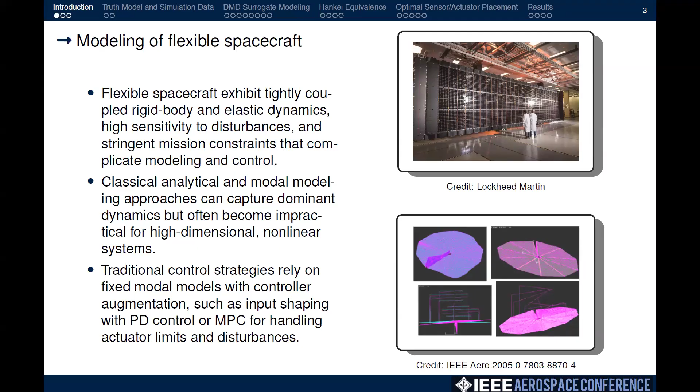Traditional control strategies rely on fixed modal models with controller augmentations such as input shaping with proportional derivative control or model predictive control for handling actuator limits and disturbances. Data-driven methods enable dynamic models to be identified directly from simulation or flight data, avoiding explicit modeling of underlying physics. Recent work demonstrates promise for predictive control of flexible spacecraft using data-driven reduced order models.

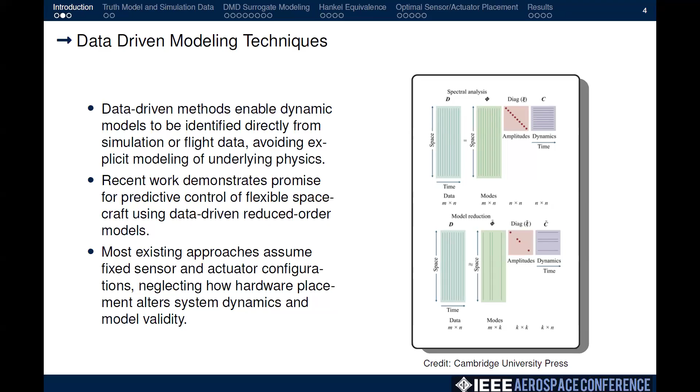Most existing approaches assume fixed sensor and actuator configurations, neglecting how hardware placement alters system dynamics and model validity. Classical analytical solutions provide a baseline for validation, but may lose accuracy as system dimensionality, nonlinearity, or configuration complexity increases. Changes in sensor and actuator mass, location, and configuration can invalidate analytically derived models or degrade controller performance.

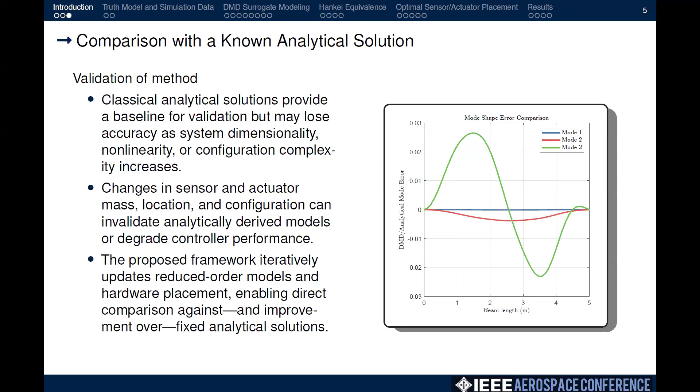The proposed framework iteratively updates reduced order models and hardware placement, enabling direct comparison against and improvement over fixed analytical solutions.

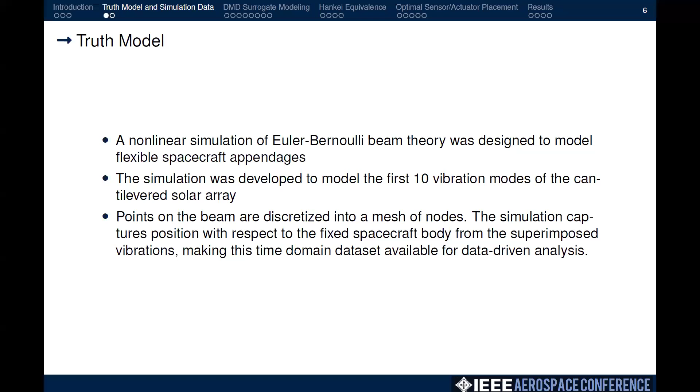Truth model and simulation data. A nonlinear simulation of Euler-Bernoulli beam theory was designed to model flexible spacecraft appendages. The simulation was developed to model the first 10 vibration modes of the cantilevered solar array. Points on the beam are discretized into a mesh of nodes. The simulation captures position with respect to the fixed spacecraft body from the superimposed vibrations, making this time domain dataset available for data-driven analysis.

This model is regarded as truth to establish a baseline by which data-driven surrogate models may be contrasted. Shown below are the parameters used to model the first 10 vibrational modes, and a plot of each of the first 10 vibrational modes plotted independently in the same figure.

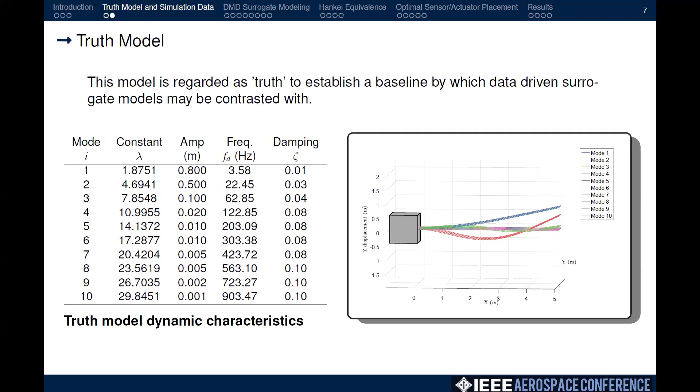Surrogate modeling via dynamic mode decomposition. The analytical truth model produces high-dimensional time series data. The data are a mesh of points representing the physical locations on the structure and the time history of movement of the point. An appropriately chosen low-dimensional surrogate model is the intended output. Data-driven methods will be employed to determine this model.

The surrogate model has a known analytical solution. Therefore, a comparison can be made between the surrogate model and its analytical solution, and observations can be made about the fidelity of the data-driven modeling technique. Furthermore, the data-driven technique lends itself directly to a known optimization routine, yielding a novel approach.

Dynamic mode decomposition is a data-driven algorithm that identifies the spatiotemporal coherent structures from complex and nonlinear systems by approximating them with a high-dimensional linear model. Dynamic mode decomposition can be carried out by aligning node positions into vectors x as a time series. Then the vectors can be aligned into two time-shifted matrices, X and X prime.

These two matrices, X and X prime, can be related by a best fit linear operator, A, to move each of the high-dimensional vectors one time step into the future, such that X prime is the product of A and X. For translation waves and evolving systems with distinct modal characteristics, this routine is sufficient. But for standing waves, it has been noted that the process fails to identify the underlying system.

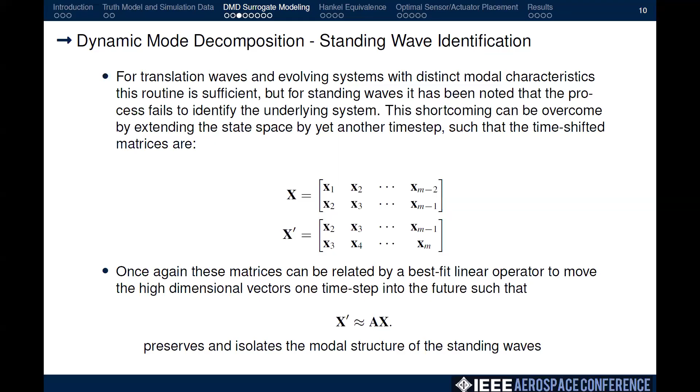This shortcoming can be overcome by extending the state space by yet another time step, such that the time-shifted matrices are X and X prime, as shown below. Once again, these matrices can be related by a best-fit linear operator, moving high-dimensional vectors one time step into the future, such that X prime is the product of A and X. This preserves and isolates the modal structure of the standing waves.

The determination of A may be as trivial as producing a pseudo-inverse of X and solving X prime X dagger equals A. For the data-driven methods, the row space of X may be in the tens of thousands or more, and the column space will be nearly as long as the number of time steps, typically less than the row space. For the identification of standing waves, the row space doubles. This computation is not practical.

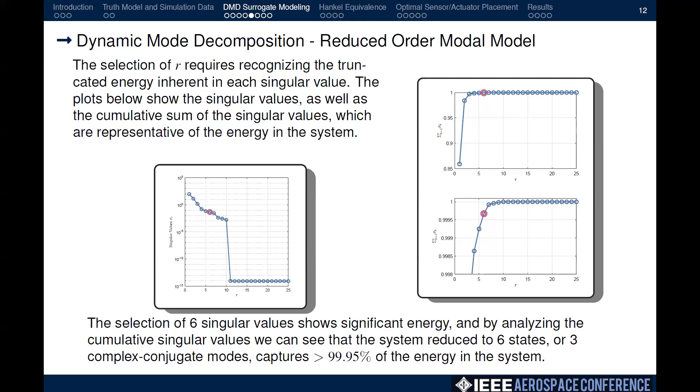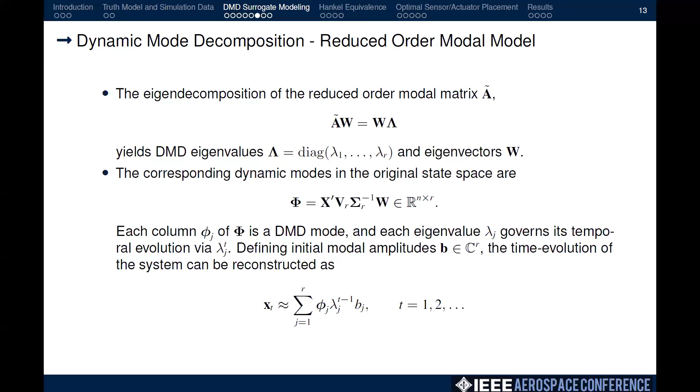The eigendecomposition of the reduced order modal matrix A tilde yields the dynamic mode decomposition eigenvalues lambda and eigenvectors W. The corresponding dynamic modes in the original state space are given by phi, where each column of phi is a dynamic mode, and each eigenvalue, lambda, governs its temporal evolution via lambda t. Defining initial modal amplitudes, the time evolution of the system can be reconstructed as shown below.

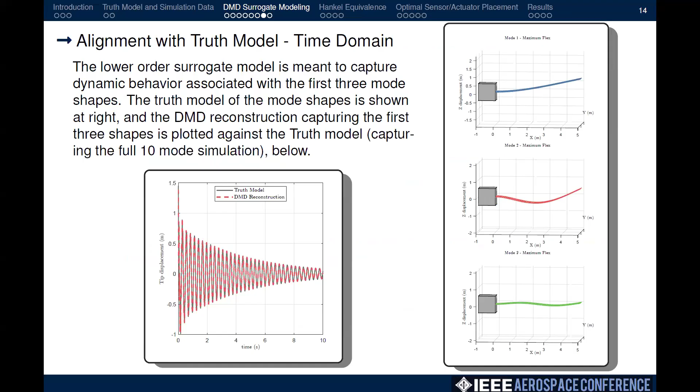The lower order surrogate model is meant to capture dynamic behavior associated with the first 3 mode shapes. The truth model of the mode shapes is shown at right. The dynamic mode decomposition reconstruction capturing the first 3 shapes is plotted against the truth model, capturing the full 10 mode simulation below.

Data-driven and Gramian product Hankel equivalence. For optimal sensor actuator placement, we first define a balanced representation of the controllability and observability Gramians. We aim to show that balanced observability and controllability Gramians can be produced for a linear time invariant system from the data-driven Hankel matrix. By virtue of the distinct mathematical objects, these Gramians will not be identical. The balanced realization is achieved by proving the spectral composition is the same.

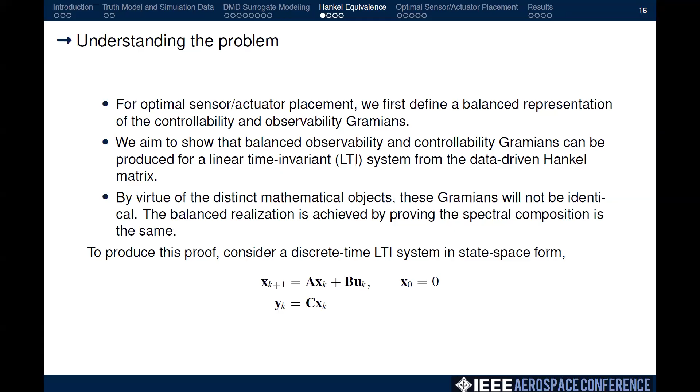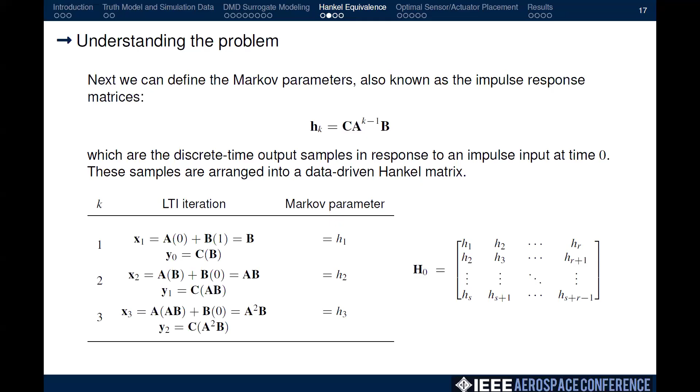To produce this proof, consider a discrete time LTI system in state space form. Next, we can define the Markov parameters, also known as the impulse response matrices, by H, which are the discrete time output samples in response to an impulse input at time 0. These samples are arranged into a data-driven Hankel matrix, as shown below. If we look at the structure of the observability and controllability matrices, and furthermore, their product, we arrive once again at the impulse response matrix, which is the Hankel matrix.

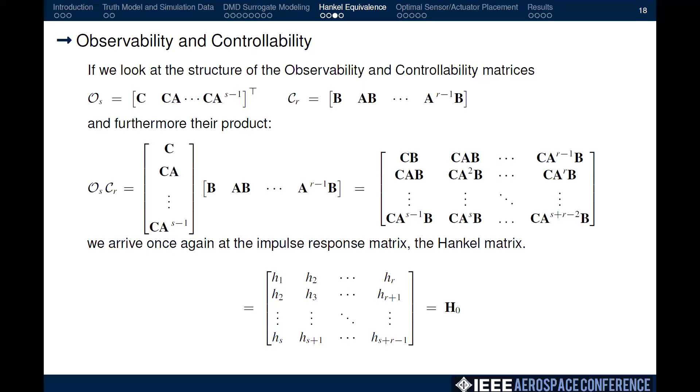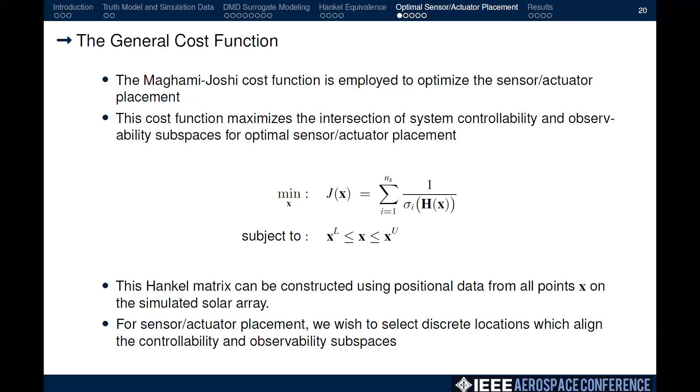Optimal sensor actuator placement. The Maghami-Joshi cost function is employed to optimize the sensor actuator placement. This cost function maximizes the intersection of system controllability and observability subspaces for optimal sensor actuator placement. This Hankel matrix can be constructed using positional data from all points X on the simulated solar array. For sensor actuator placement, we wish to select discrete locations which align the controllability and observability subspaces.

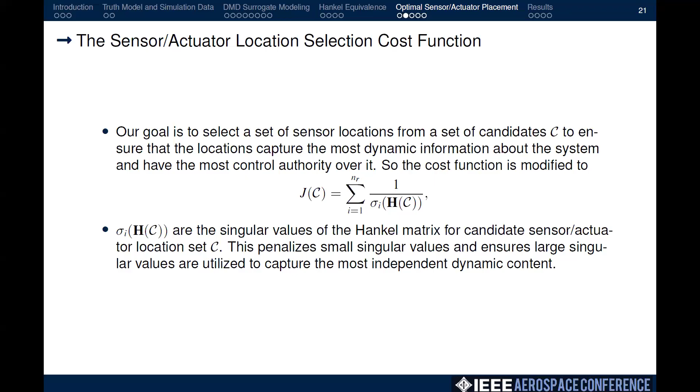Our goal is to select a set of sensor locations from a set of candidates, C, to ensure the locations capture the most dynamic information about the system and have the most control authority over it. So the cost function is modified to utilize the Hankel matrix of data from candidate locations. Sigma i of HC are the singular values of the Hankel matrix for candidate sensor actuator location set C. This penalizes small singular values and ensures large singular values are utilized to capture the most independent dynamic content.

The cost function was evaluated over the exhaustive search space to ensure a global minimum was found. For higher order, higher dimensional problems, this approach may not be possible, but the study at hand is not concerned with optimal search space strategy. As we see below here, the optimal candidate locations are right next to each other on the tip of the solar array. And that's also identified in the minimum values of the objective function on the right.

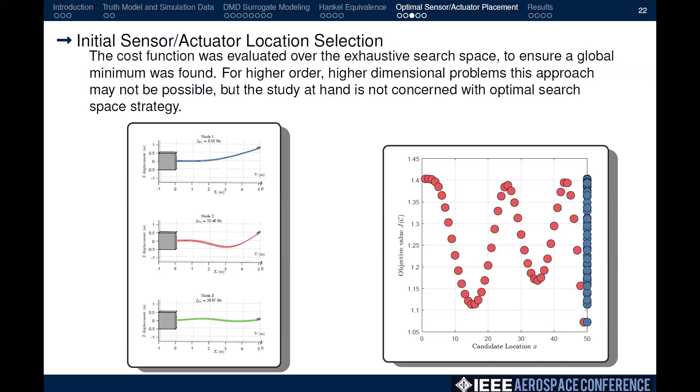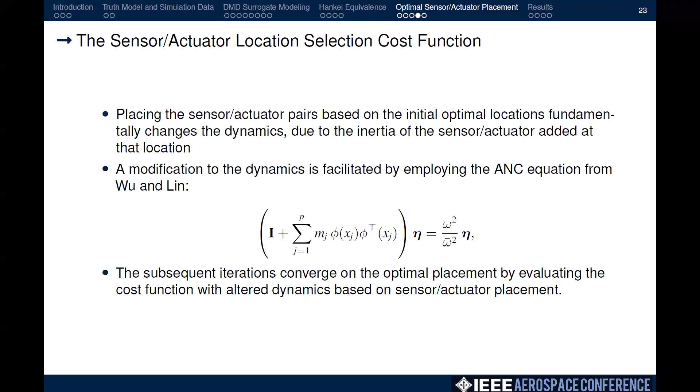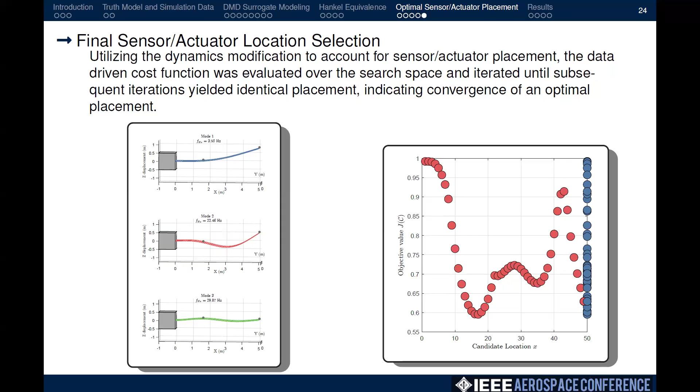The results. The overall intent was to prove a method that is scalable to highly complex systems which may not have analytical solutions for sensor actuator placement methods. Since the control, B, and observation, C, matrices are derived from a balanced realization, verifying results in a controller implemented on the system is sufficient to demonstrate performance of the optimized system. The sensor actuator placement was implemented in an LQR optimal control scheme set to null vibration response, and results proved that the optimized locations required the least energy and showed the best time domain performance.

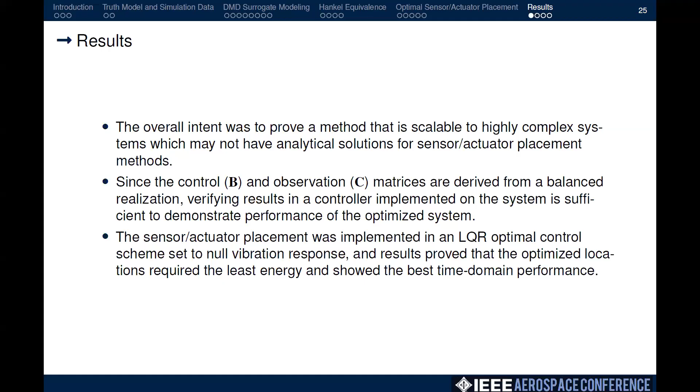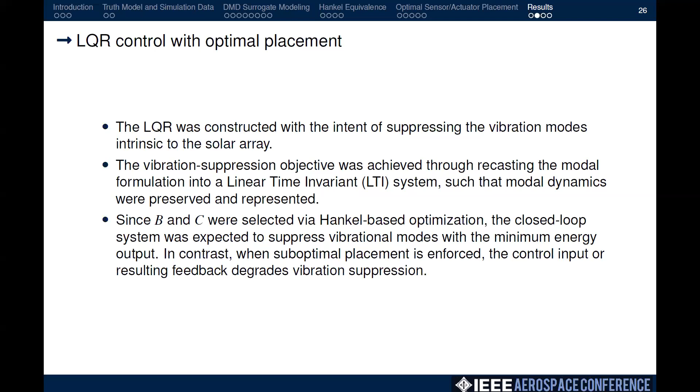The LQR was constructed with the intent of suppressing the vibration modes intrinsic to the solar array. The vibration suppression objective was achieved through recasting the modal formulation into a linear time invariant system such that modal dynamics were preserved and represented. Since B and C were selected via Hankel-based optimization, the closed-loop system was expected to suppress vibrational modes with the minimum energy output. In contrast, when suboptimal placement is enforced, the control input or resulting feedback degrades vibration suppression.

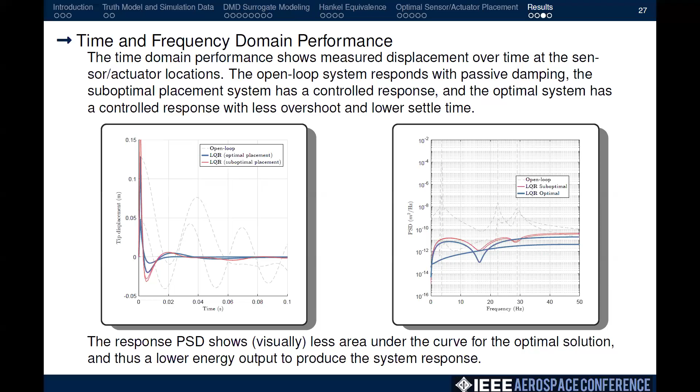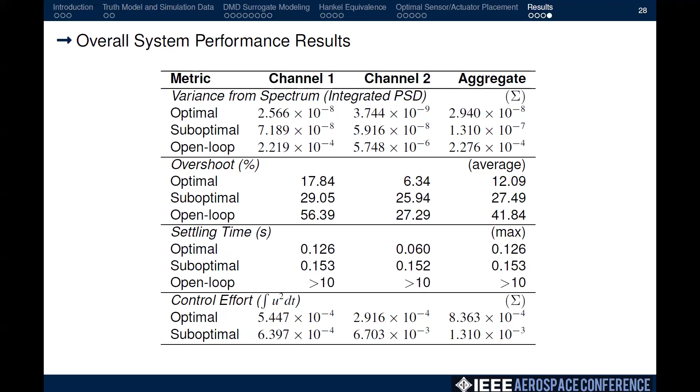The overall system performance results are shown below. We can see that for variance from the spectrum, which is the integrated PSD, overshoot percentage, settling time, and integrated control effort, the optimal placement has greater performance than suboptimal or open loop in all of the applicable realms. Thank you all very much.